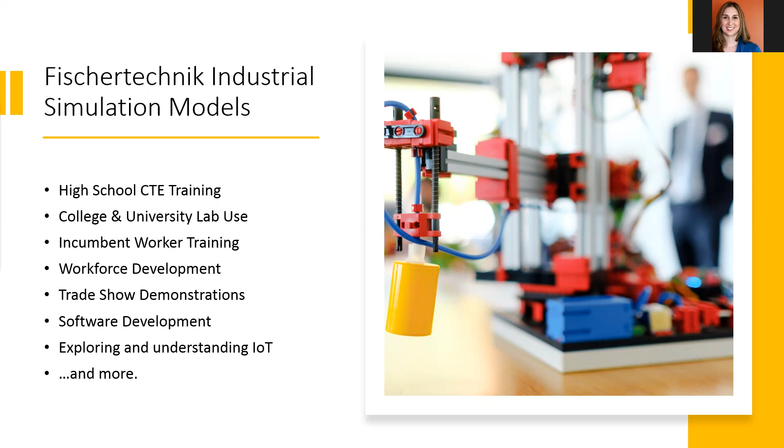Whether you're an educator at the high school level involved in CTE training, a college professor or industrial trainer teaching programming skills required in manufacturing, a company looking for ways to demonstrate their software-based solutions, or someone looking for ways to make IoT-related concepts easier to understand to employees or customers, I believe this presentation will offer some important options for you to consider.

Let's start off by considering the skills gap. If you've attended any of our other Fischertechnik education webinars, you've probably heard me discuss the importance of STEM education. STEM is the acronym for science, technology, engineering, and mathematics, and it should go without saying that STEM education has been perhaps the most discussed topic in education over the last decade.

As most of us are aware, the push for developing STEM skills in students is in large part to help best prepare them to take their place in the modern workforce.

Not so long ago when our parents or grandparents were entering the workforce, employers in areas such as manufacturing might have been satisfied with hiring workers who could demonstrate good motor skills and a solid work ethic. But as manufacturing becomes more and more dependent upon automated processes and robotic control, employers now desperately need individuals who have a background in areas such as mechatronics, industrial electricity, mechanical components, and programming PLCs.

As it ties in directly with the solutions we will be looking at in this presentation, let's consider that last skill area that I just touched upon, that of a PLC programmer.

First off, for anyone who may not be familiar, let me explain exactly what a PLC is. The term PLC is an acronym, the letters of which stand for Programmable Logic Controller. Essentially a programmable logic controller, or PLC, is a very specialized computer used to control the types of machines and automated processes typically found in an industrial setting, such as an automated manufacturing plant.

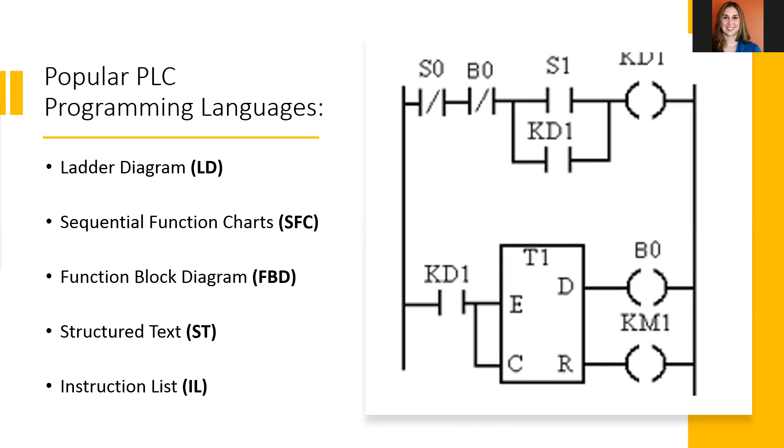Once again, while many students can learn PLC programming skills in a college lab setting, there are many other options available: high school CTE (career and technical education) programs, adult continuing education programs, vocational and technical training in trade schools, and employer-sponsored incumbent worker training programs.

That all being said, the question that still arises for the educator, whether in the university or vocational school setting, is how do you teach PLC programming in a way that makes it engaging and relevant to the student, whatever their background? How do you get away from the dryness of textbooks and video presentations and instead make it realistic and hands-on? But there are other areas of focus beyond programming that need solutions for demonstrating, exploring, and understanding different aspects of automation and control systems.

It could be a company involved in creating or marketing a new type of software-based solution, looking for ways to make more tangible processes which might otherwise be perceived as abstract, or to test it out in a more realistic fashion. Maybe it's a manufacturer looking for a way to better visualize the production process for workers or stakeholders as they prepare to build a new factory.

Or perhaps it's a company looking for an engaging way to demonstrate their services or solutions in a public setting, such as a trade show. In each of these cases and more, there is a need for finding a solution that is engaging and which can effectively mimic and simulate real-world automated systems.

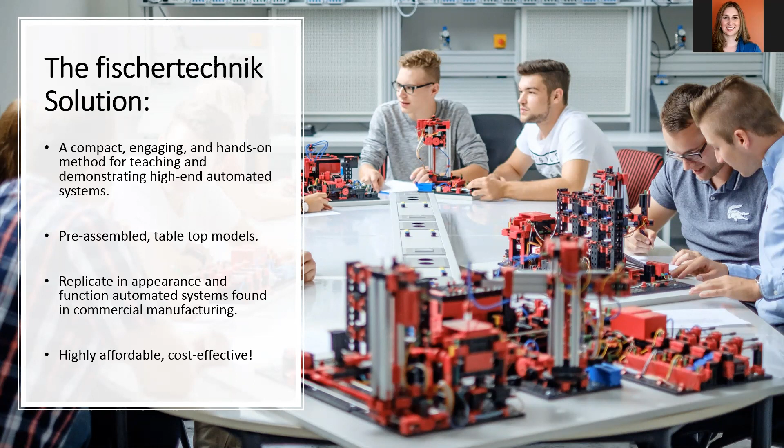And that brings us to the line of Fischertechnik industrial simulation and training models. These models have been designed with the intent of providing a compact, engaging, and hands-on method for teaching and demonstrating high-end automated systems. The line consists of a series of pre-assembled small-scale models which are designed to replicate, in both appearance and function, various automated robotic machines and systems commonly used in commercial manufacturing.

But before we look at each of these models, let me provide you with just a little bit of background. Fischertechnik has been creating tools for teaching students of all ages how technology works for over 50 years, based around their unique building system.

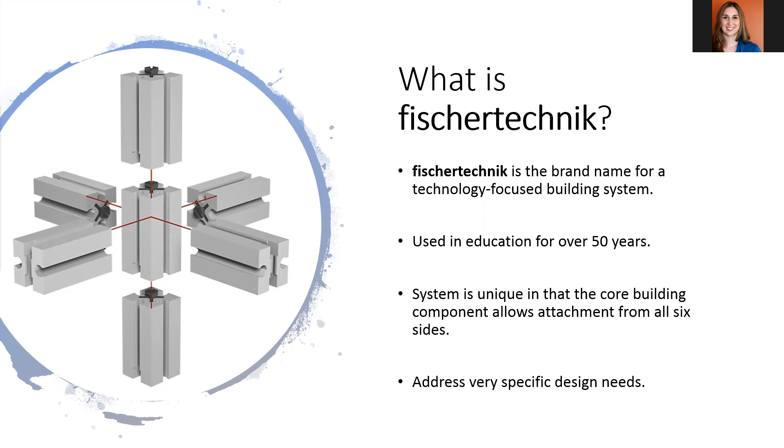What makes their building system so unique is that unlike other popular construction systems where the components are designed to simply stack, the Fischertechnik system was created with more of an engineering mindset. The core building block in their system is designed to enable attachment from all 6 sides, and because of this it allows for almost limitless design possibilities. Many of the parts are designed to slide together and lock in place using a tongue and groove assembly method, and the hundreds of different parts available also help to address very specific design needs.

The Fischertechnik system was created back in the 1960s by German inventor Artur Fischer, who's noted for countless innovations used in construction and the automotive industries. Mr. Fischer, at the time of his death in 2016, held more patents in his name than Thomas Alva Edison had amassed during his own lifetime.

Besides Fischertechnik, Mr. Fischer was the inventor of synchronized flash photography back in 1949, as well as the creator of the expanding nylon wall plug, which is used in conjunction with a screw or a bolt to help anchor heavy objects to walls. We've all used them, of course. His company, the Fischer Group, employs thousands of individuals worldwide, producing many variations of fastening devices used in building construction.

They also produce numerous components used in automobile assembly, as well as providing consulting services to companies who wish to employ state-of-the-art manufacturing processes. Once again, the focus of Fischertechnik sets, whether those intended for the retail market or for classroom use, has always been on helping to foster an understanding of technology and how things work.

Many of the products offered by Fischertechnik for the education sector are subject-specific sets, focusing on, for example, different STEM-related areas such as mechanics, pneumatics, robotics, or renewable energy. In many of these sets, students are asked to build a progression of models using the unique Fischertechnik system, and then perform various experiments which allow them to explore and understand aspects of that subject.

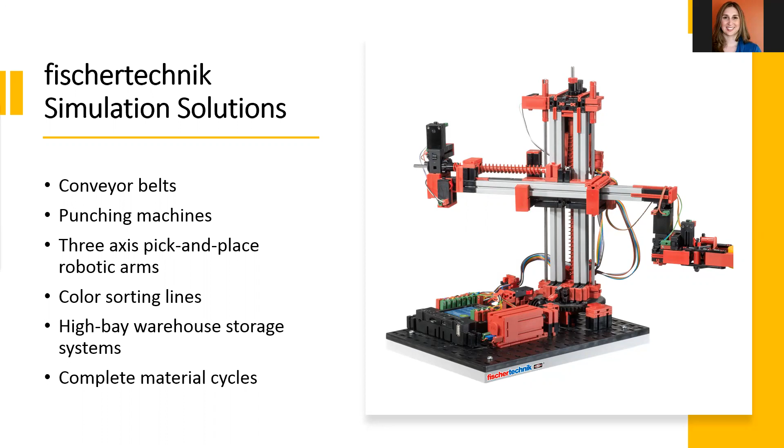Before we begin to look at the models in the simulation line in more detail, let me briefly outline some of the advantages of using Fischertechnik solutions. I do apologize in advance, as a few of the first points I'm going to touch on are things I mentioned before, but I think in each case it's worth repeating.

Fischertechnik simulation solutions allow educators to offer engaging, hands-on tools for teaching, exploring, and understanding various aspects of automation and programming. This can be for understanding how automated systems work, or for having a tangible physical system to observe and work with in a programming or PLC-focused learning environment.

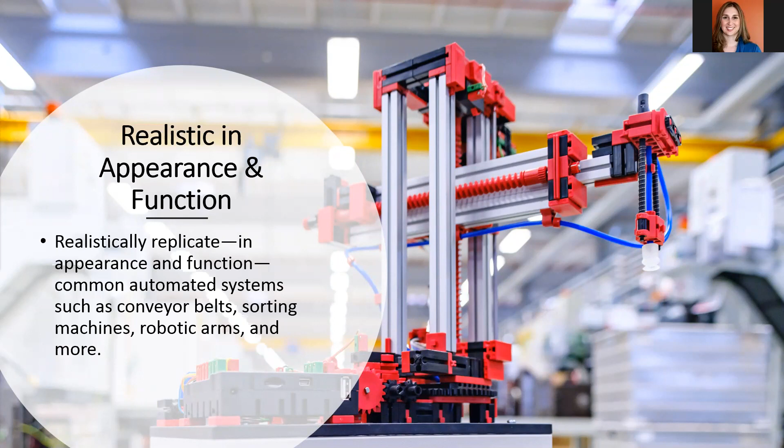The models, once again, are designed to realistically replicate, in both appearance and function, commonly automated systems such as conveyor belts, sorting machines, robotic arms, and much more.

Because the models are compact and in most cases tabletop sized, they are not only ideal for use in the classroom or in-office demonstrations, but also for demonstrating software or other technology-based offerings in a trade show environment.

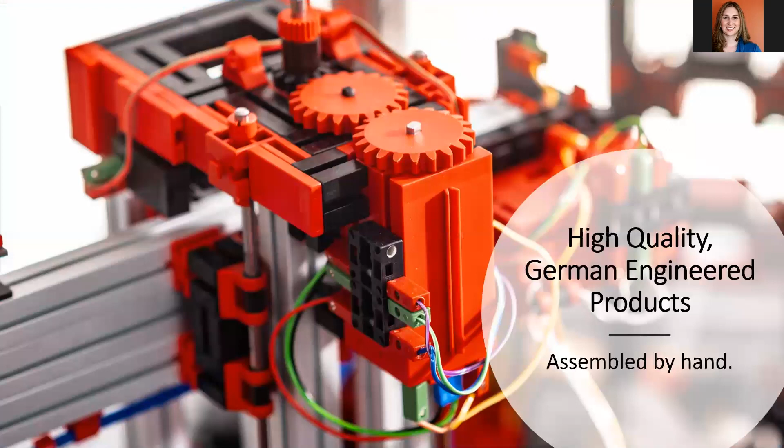Next, quality. Each fischertechnik simulation model is a hand-assembled, high-quality, German-made product.

Each of these models we'll look at today is available in a 24-volt version designed for use with industry-standard PLCs. Whether you use Allen Bradley controllers, Siemens controllers, or controllers from manufacturers such as Honeywell, Mitsubishi, General Electric, or of course many others, you can control these 24-volt versions with the PLC you prefer.

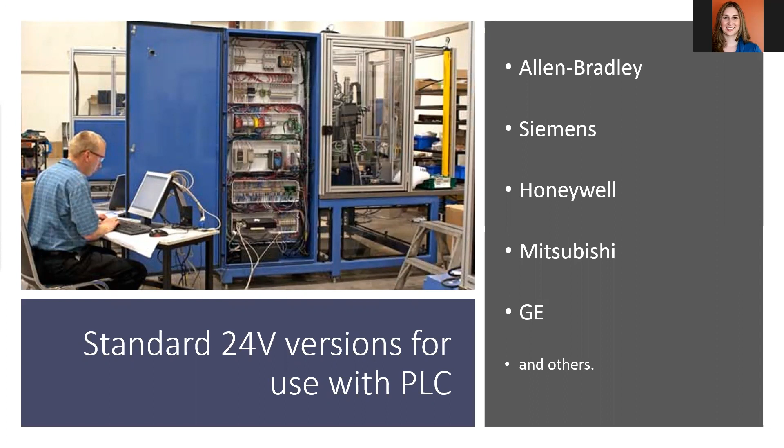Just as you can use your choice of controller, you can also use your preferred programming language. If you like ladder diagram or sequential function charts, you can use those. If you prefer function block, structured text, or instruction list, those are all available as well.

Please note that with these 24-volt versions, no PLC is included, and that all programming, with one exception I'll touch upon, along with any power sources or other hardware, are the responsibility of the end user. They are not included. This shouldn't be an issue, as these models are designed specifically for industrial users, or for those teaching or exploring industrial processes involving PLC programming.

In addition, for non-industrial users and educators not versed in or familiar with PLC programming, there are several models which are also available in 9-volt variations. These 9-volt versions ship pre-wired to fischertechnik's own proprietary robotic controllers, which are the fischertechnik Robotics TXT controllers.

Each of these controllers is pre-programmed using fischertechnik's own RoboPro graphic programming software. With these models, the only additional component required with the 9-volt versions will be the addition of one or more 120-volt power adapters, as I will specify with each model. Otherwise, in most cases, these models should be ready to use right out of the box.

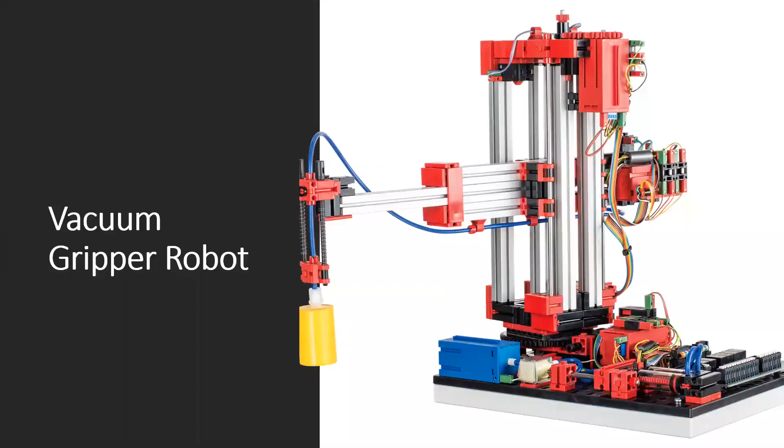And we'll have a video here. Okay, we'll see if it lags. We'll let this catch up a second before I start talking.

Yeah, it may catch up.

Now, as you'll see in this model, the vacuum gripper is a 3-axis robotic model with a vacuum gripping device. The model is designed to precisely pick up and position workpieces in 3-dimensional space. The model includes 3 encoder motors, 3 push-button limit switches, a vacuum suction device, a compressor, which is the blue brick component you'll see in the video, and a solenoid valve. The model's dimensions are approximately 9 by 19 by 15 inches, and it has a weight of about 7 pounds.

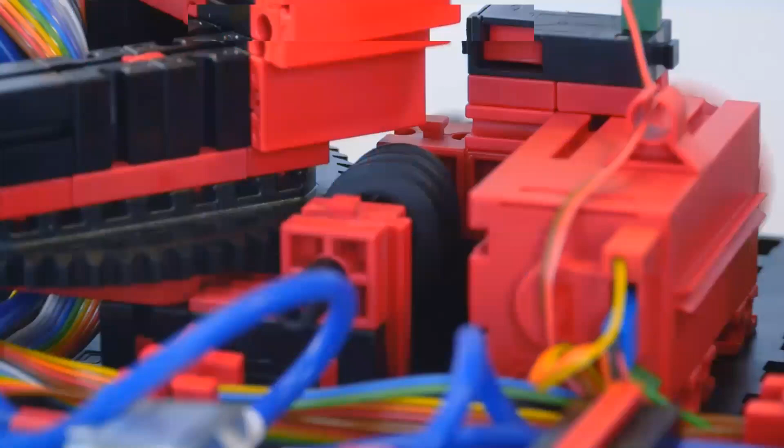The 24-volt version of this model, as well as the first 5 24-volt models we're going to look at today, each have a relay board for motor polarity reversal and both a multi-pin connector with 34 pins and a grid of 2.54 millimeters, as well as additional PCB terminals with push-in connections for all inputs and outputs. Again, the 24-volt version of this model, as well as all 24-volt versions we'll look at, will require you to provide the PLC and the programming.

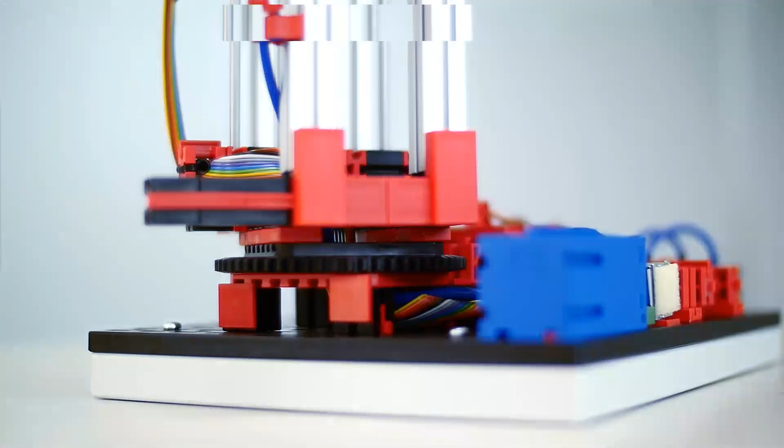Now, for a limited time, there is a 9-volt version available, which is the version you see in this video, which will once again come wired to the fischertechnik Robotics TXT controller and will ship fully programmed using RoboPro graphic programming software. If you did wish to create your own programming, individual licenses of RoboPro are available on our website. Otherwise, for this 9-volt version, only the addition of a single 120-volt power adapter will be required.

I will mention that for this and all the other models we're going to look at today, the specs are also detailed in the product listings found on the Studica website, as well as in our product brochure, which I will provide information on obtaining at the end of this presentation.

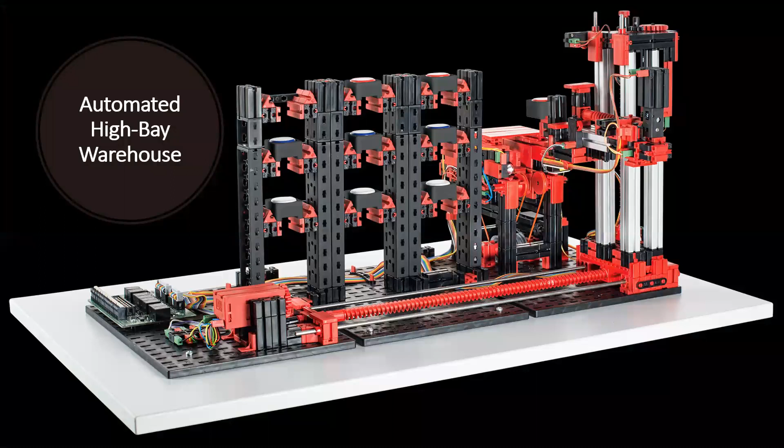Next, we're going to look at the automated high bay warehouse. And again, I thank you for bearing with me for any video lags.

This model features a transfer station with a conveyor belt, along with a shelf stacking mechanism for storing and retrieving workpiece carrier trays, and 9 individual storage spots. Components of this model include 2 encoder motors, 2 mini motors, 4 push-button limit switches, 2 photo transistors, 2 LED light barriers, and a selection of different colored workpieces, along with carrier trays for each.

I will mention that this particular model is a favorite among educators I've spoken with who teach programming because it gives you a lot to work with in regards to the movements of the picker mechanism, as well as the precision required to properly store and retrieve each piece, each step of which will of course require its own very specific coding. The dimensions for this model are approximately 19 by 28.5 by 15 inches, and it has a weight of approximately 18 pounds.

Once again, the 24-volt version has a relay board for motor polarity reversal and both a multi-pin connector, again 34 pins with a grid of 2.54 millimeters, as well as additional PCB terminals with push-in connections for all inputs and outputs. Again, you will need to provide your own PLC and programming.

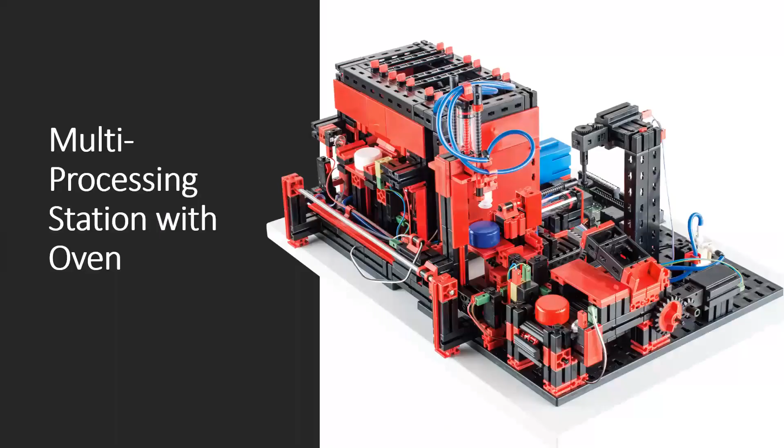I will mention that a limited edition 9-volt version is available at this time, which again is pre-wired to a pre-programmed robotics TXT controller. And in this case, one 120-volt power adapter will be required. Next up in our line is the multi-processing station with oven simulation.

This model features a furnace simulation, which you will see in just a second, with a pneumatic sliding door. There is a downstream processing station with a pneumatic transfer unit that includes a vacuum gripper, a cutter with a rotary table, and a conveyor belt.

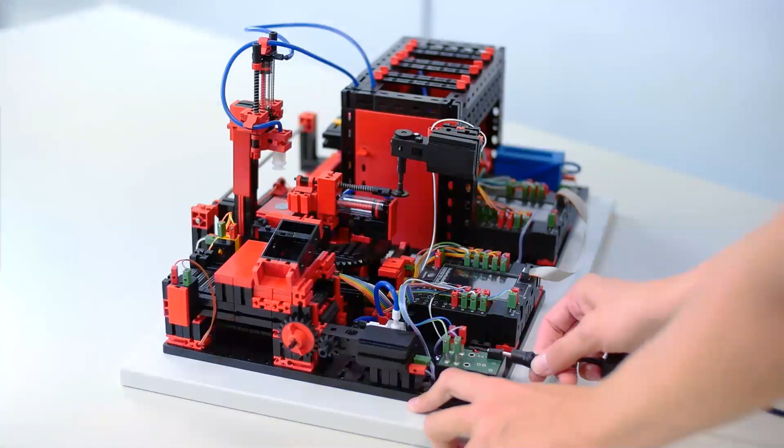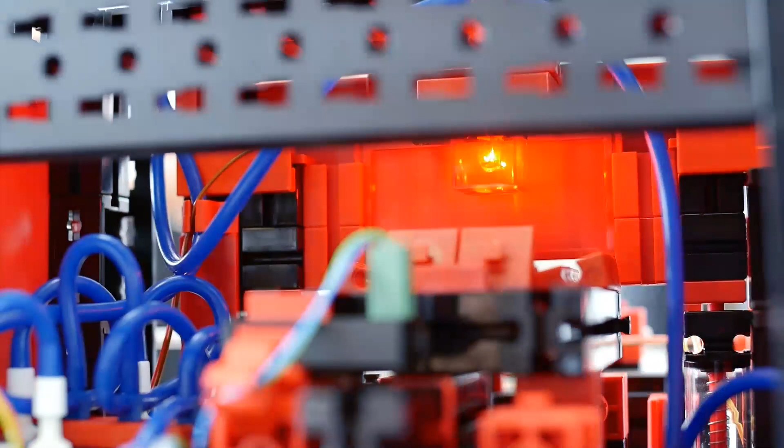Components used on this model include 4 mini motors, 6 push button limit switches, 2 photo transistors, 2 LED light barriers, 4 solenoid valves, and a compressor. The dimensions for this model are approximately 20 by 14 by 12 inches, and it has a weight of about 11 pounds.

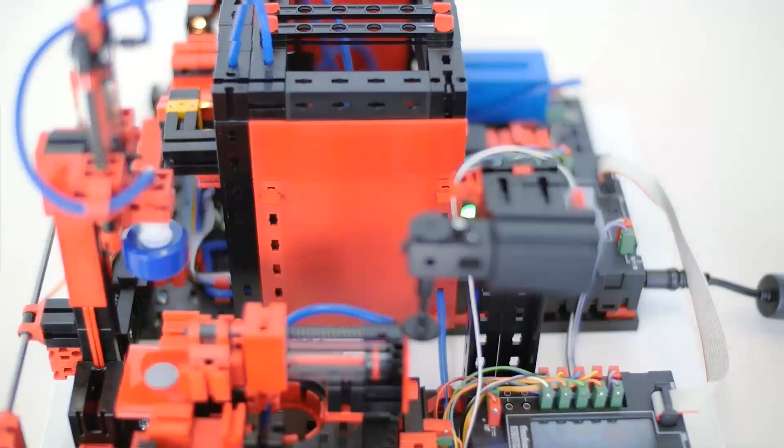Again, the standard version of this model is a 24-volt version for use with the PLC of your choice, with, once again, a relay board for motor polarity reversal, and both a multi-pin connector, again 34 pins with a grid of 2.54 millimeters, as well as additional PCB terminals with push-in connections for all inputs and outputs.

The limited edition 9-volt version in this case is connected to 2 robotics TXT controllers, so 2 120-volt power adapters in this case will be required for all operations.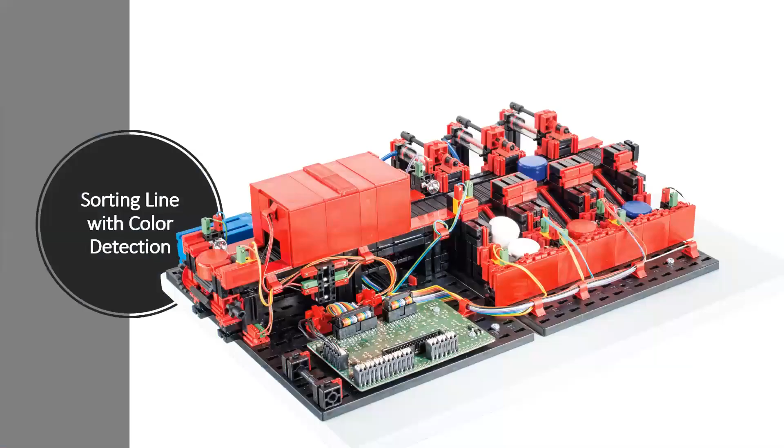Next up is the sorting line with color detection. This simulation features a system for detecting workpieces of different colors and sorts them via a conveyor belt into 3 different storage bins. Components on this model include 2 mini motors, 5 photo transistors, 5 LED light barriers, 3 solenoid valves, a compressor, and an optical color sensor.

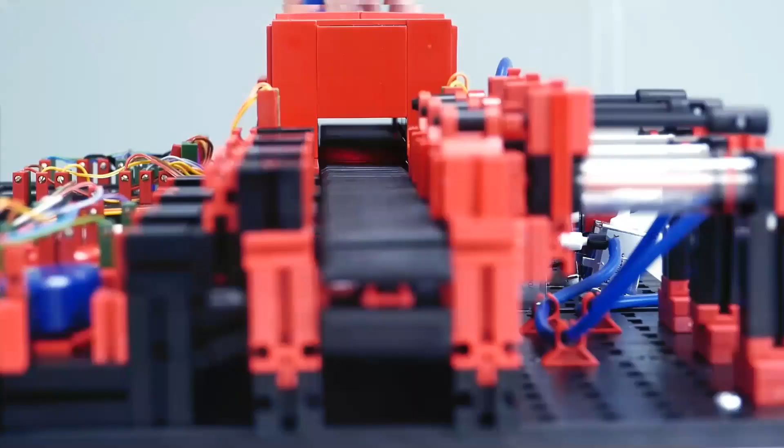The dimensions for this model are approximately 20 by 14 by 12 inches, and it has a weight of about 10 pounds. Now, as with the models we've looked at before, the standard 24-volt version has a relay board for motor polarity reversal and both a multi-pin connector, again 34 pins with a grid of 2.54 millimeters, as well as additional PCB terminals with push-in connections for all inputs and outputs.

Now, again, you will need to provide the PLC and the programming. And there is a limited edition 9-volt version, very limited right now, which comes again pre-wired to a pre-programmed TXT controller. And in this case, one 120-volt power adapter is required.

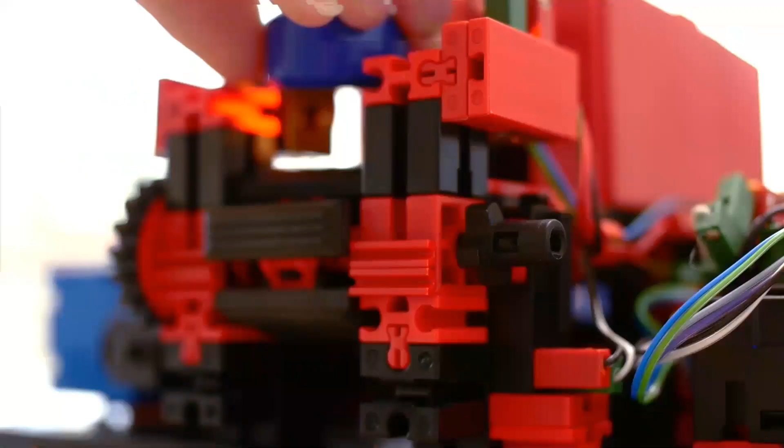And that's all of those.

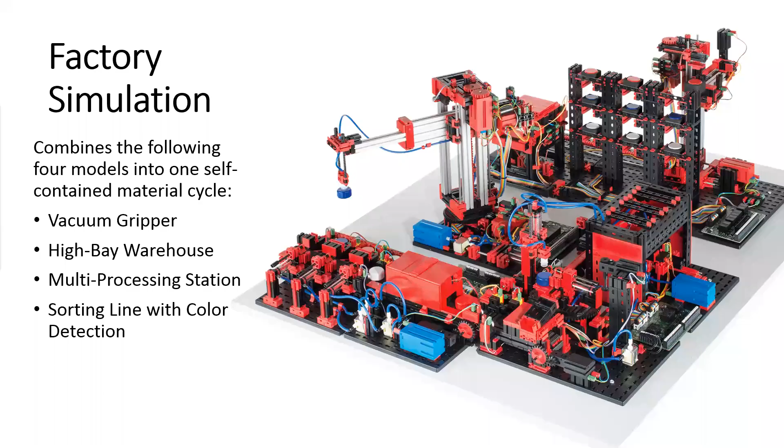The next model is the factory simulation, which combines the 4 models that we've just reviewed. Again, the vacuum gripper robot, the automated high bay warehouse, the multi-processing station with oven, and the sorting line with color detection into one self-contained material cycle.

The cycle we're going to see works like this. Work pieces are retrieved from the automated high bay warehouse using the vacuum gripper robot, and then moved to the multi-processing station with the oven. After the workpiece has been processed by this machine, it is then sorted by color in the sorting line with color detection, before again being moved by the vacuum gripper robot to the automated high bay warehouse for storage.

Now, as we've already discussed the components of each model previously, I won't belabor it by restating them here, but what I do want to discuss are the dimensions of this model as a whole. As it again combines 4 individual models into one work cycle, it has a much larger footprint of approximately 39 by 31 by 16 inches, and it has a weight of between 43 and 46 pounds, depending on whether we are talking about the 24-volt version or the limited edition 9-volt version pre-wired to the TXT controllers.

Now, due to these dimensions, please note that this model will only be shipped flat as freight on a pallet. And I also want to point out that as the factory simulation models tend to be in high demand, we would ask that you please anticipate a possible turnaround time of up to 3 weeks prior to any orders for this model leaving our warehouse.

Now, a few other things to note. First, this is currently available in the standard 24-volt version and in very limited quantities in a 9-volt version. Now, in this instance, the 9-volt version is wired to 5 robotics TXT controllers. As such, it will require 3 120-volt power adapters.

Now, as always, the 24-volt version will require the end user to provide any PLCs, all programming, and any other hardware required. Again, each station on the 24-volt version has a relay board for motor polarity reversal, and both the multi-pin connectors, again 34 pins with a grid of 2.54 millimeters, as well as additional PCB terminals with push-in connections for all inputs and outputs.

Now, before we move on to the next group of models, I do want to mention that there is a storage option available for those users of either of the two factory simulations we've just discussed, who might want to transport the model, or if you just want to protect it when you're not using it.

Now, this travel case consists of an aluminum case maker profile with plastic plates, and steel ball corners, as well as 4 steel tilt handles and angle protection corners. The upper section of the case is partially lined with soft foam blocks in different heights to help cushion the model, and it also has 3 internal zipper pockets for storing cables and other accessories.

The lower portion is lined with hard foam. It's designed so that once the top of the travel case is removed, the model can remain in the bottom section of the case and still remain fully functional. The case itself has exterior dimensions of approximately 41 by 33 by 17 inches, and it has a weight of about 53 pounds. Now, please note that even when using the travel case, these models will still need to be shipped flat.

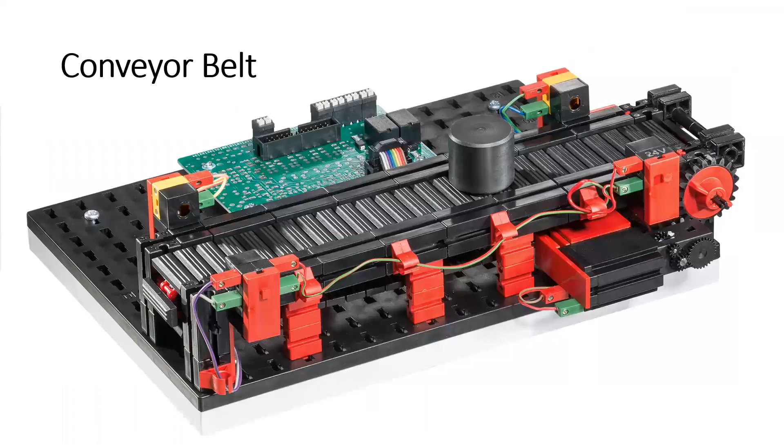The next model is a basic conveyor belt. This is a transport belt with a length of 275 millimeters that is used to transport workpieces with a diameter of up to 29 millimeters. Multiple conveyors can easily be connected to increase the length of transport as desired.

Components on this model include an XS motor, a push-button limit switch, 2 phototransistors, and 2 LED light barriers. Dimensions of this model are approximately 14 by 10 by 4 inches, with a weight of under 2 pounds. As before, the standard 24-volt variation includes a multi-pin connector, in this case 26 pins with a 2.54 millimeter grid, as seen here. For a limited time, we also offer 9-volt versions pre-wired to the robotics TXT controller, as shown here. One 120-volt power adapter is required for operation.

The next model is a variation on the conveyor belt, but which includes a punching machine. This is essentially the same conveyor as we just looked at, except that this time it has a machining station attached to it. Components on this model include 2 XS motors, 2 push-button limit switches, 2 phototransistors, and 2 LED light barriers. Dimensions of the model are approximately 15 by 12 by 7.5 inches, with a weight of about 3.5 pounds.

Again, this is available in the standard 24-volt variation with a 26-pin connector and a 2.54 grid, as shown here. For a limited time, we will also be offering a 9-volt version wired to the robotics TXT controller, which requires one 120-volt power adapter for use.

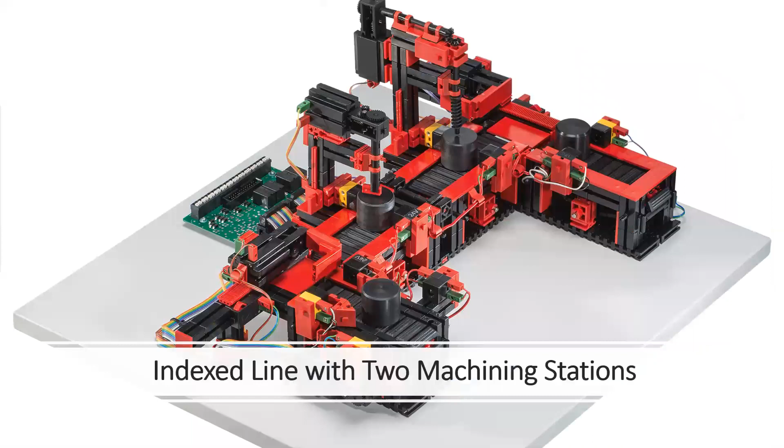The next model is the indexed line with 2 machining stations. This model features a U-shaped conveyor line consisting of a milling and a drilling station and 4 conveyor belt sections. Components on this model include the 4 conveyor belts, 8 XS motors, 4 push-button limit switches, 5 phototransistors, and 5 LED light barriers.

The dimensions for this model are approximately 19 by 18 by 11 inches, with a weight of about 8 pounds. Again, it's available in both the standard 24-volt version with a 26-pin connector and a 2.54 millimeter grid for use with PLC, and also in a limited release 9-volt version wired to the pre-programmed robotics TXT controllers, requiring one 120-volt power adapter.

Next is a variation on the idea of a pick-and-place robot, which is the 3D or 3-axis robot. The 3-axis robot has gripping forceps, which it uses to help it quickly and precisely position the workpiece as it picks it up in 3-dimensional space.

The degrees of freedom for the robot are as follows. Axis 1 turns 180 degrees. Axis 2 can move forward or backward 90 millimeters, and axis 3 can raise or lower 150 millimeters.

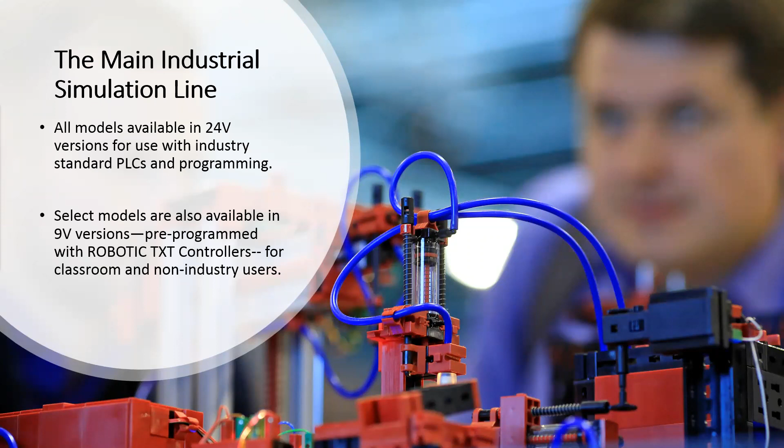That concludes our look at the first 9 variations of simulation models. The next pair of simulation models focuses specifically on the area of IoT and is designed for demonstrating and teaching about cloud-based monitoring and control.

These models go by the name of Training Factory Industry 4.0, and are available in both 24-volt versions for use with PLC, and also in a 9-volt variation for classroom and demonstration purposes. They've been designed to help address how the recent changes in industrial production, driven by digitization, have created a need for stronger networking and more relevant information on all production levels.

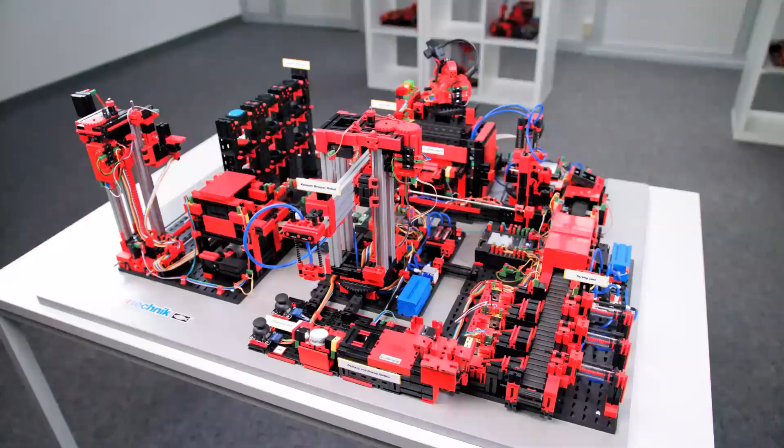With this Industry 4.0 update of the existing factory simulation model, such digitization activities can be simulated, learned, and applied on a small scale before they are implemented on a larger scale. As the following video showcasing the 24-volt version provides a nicely narrated overview of how the factory works, I'm going to step back for a moment and allow you to watch and listen to the narrator.

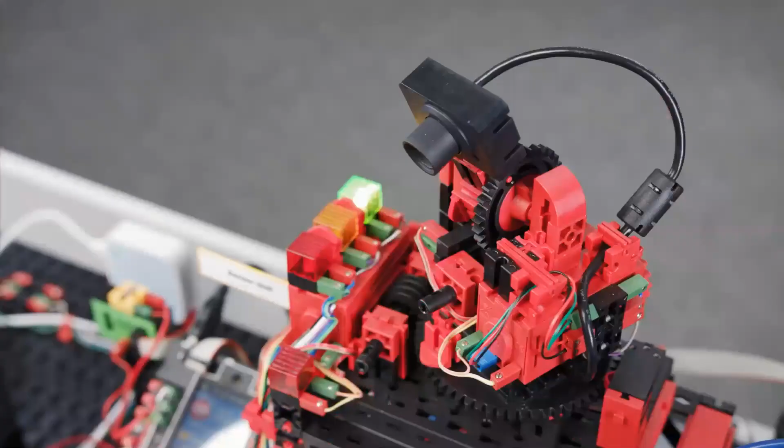Fischertechnik Learning Factory 4.0 illustrates processes for a digitized smart factory, from delivering raw material to the finished product. Industry 4.0 applications can be tested and demonstrated using the simulation model. Digitization activities are simulated on a small scale and learned before they are used on a large scale.

The training and simulation model demonstrates the process from the delivery, collection, and storing of the materials through the ordering and manufacturing processes to delivering the finished product.

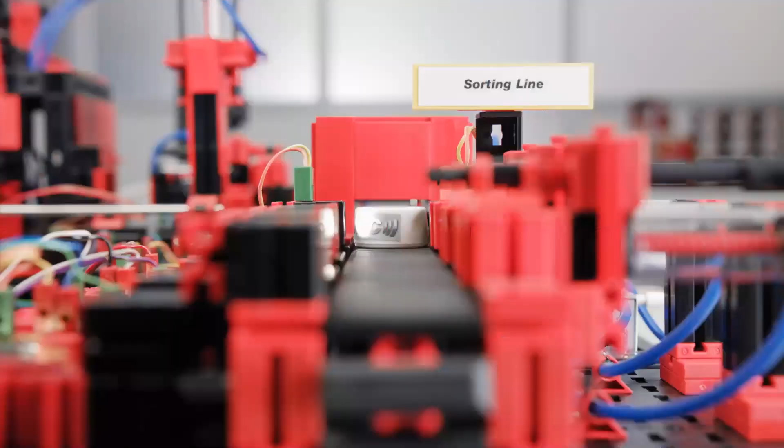The training factory industry is controlled by a PLC controller, a Raspberry Pi as IoT gateway, and a TXT controller. The PLC program controls the individual modules of the factory. The program is written in structured text.

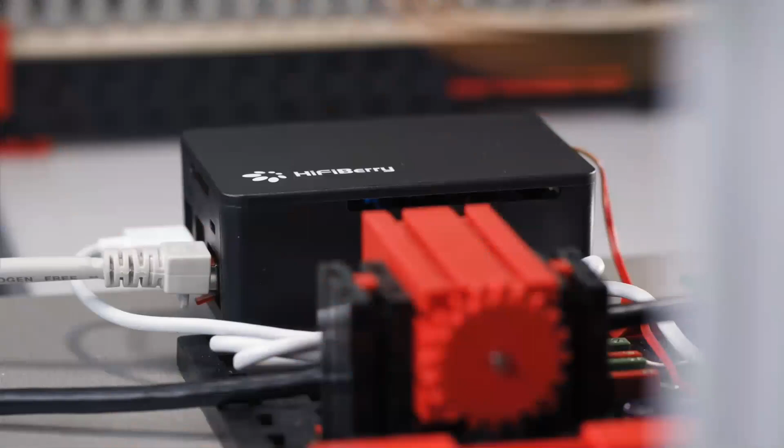The PLC communicates via the standard OPC UA protocol with the Raspberry Pi, which acts as an IoT gateway to connect the factory to any cloud. The program on the Raspberry Pi is implemented in Node-RED. In Node-RED, there is an additional local dashboard available, which can be adapted to your own needs.

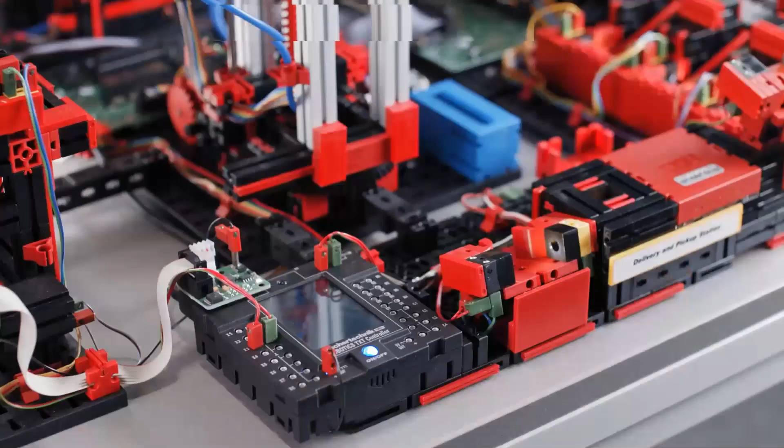The Raspberry Pi also communicates with the TXT controller via the standard MQTT protocol, which in turn enables access to the fischertechnik cloud. The program on the TXT controller is executed in C/C++.

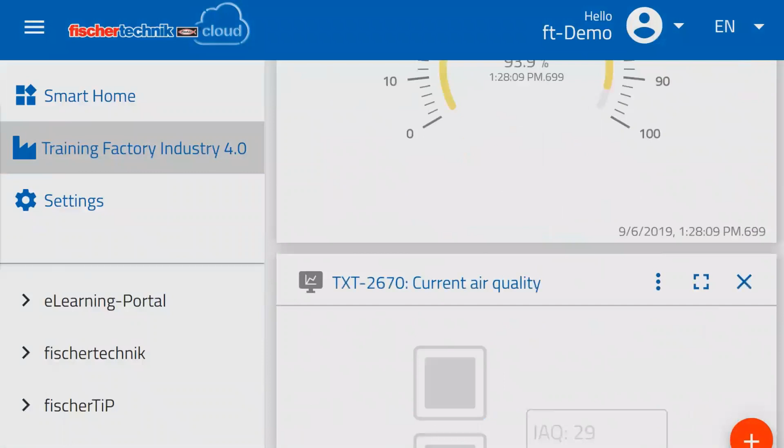The sensor image data are used and monitored in the fischertechnik cloud. The integrated WLAN router transmits factory process data to the cloud in real time. The data is presented on a web-based dashboard.

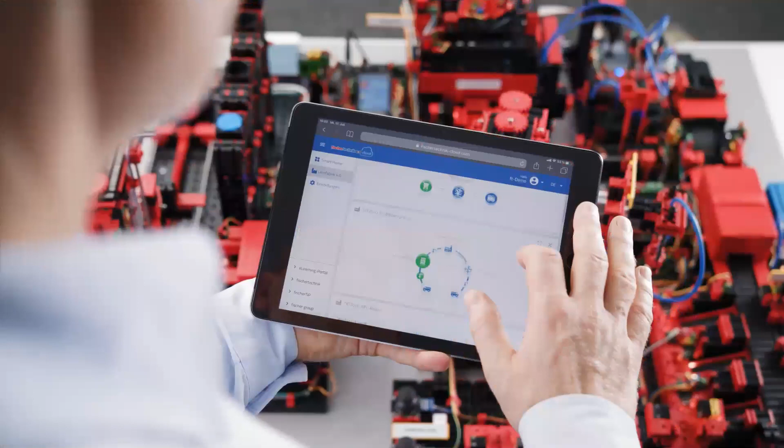Three views are available: the customer view, supplier view, and production view. The views and data can be accessed using internet-enabled devices and can also be used remotely.

The USB camera is controlled from the cloud and can view the entire factory. A sensor station measures air pressure, air quality, temperature, humidity, and brightness.

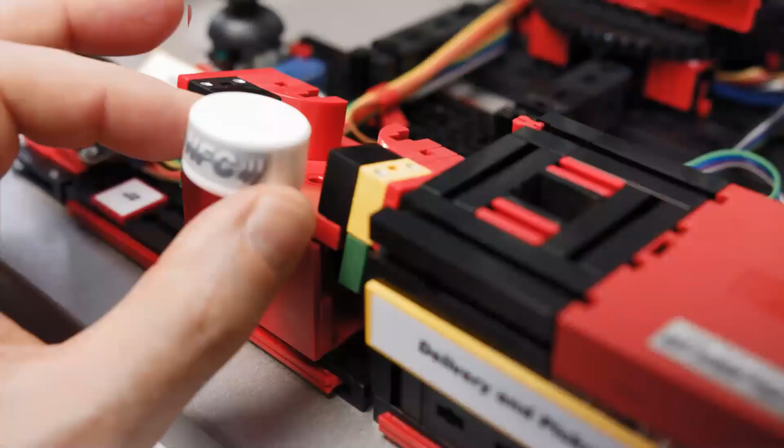The default process cycle begins with storing and identifying the material. Using RFID/NFC technology ensures that the material can be digitally traced. The integrated NFC tag stores production data that can be read out via the RFID/NFC module.

The cloud displays the part's color and ID number. The vacuum gripper places suction on the material and transports it safely to the high bay warehouse. The production view on the dashboard shows where the product is in the manufacturing process.

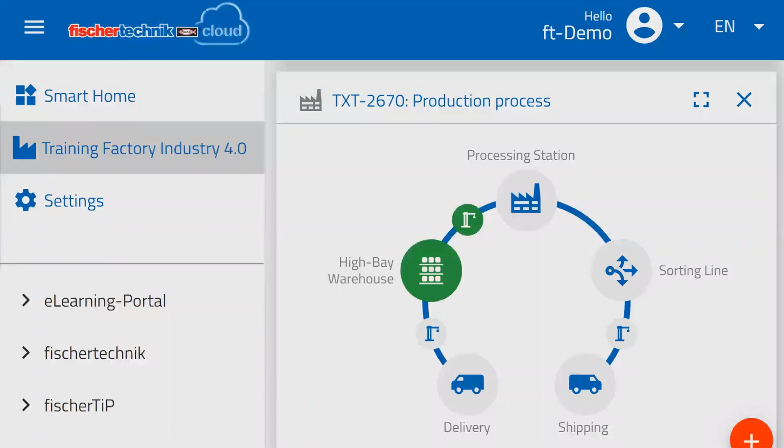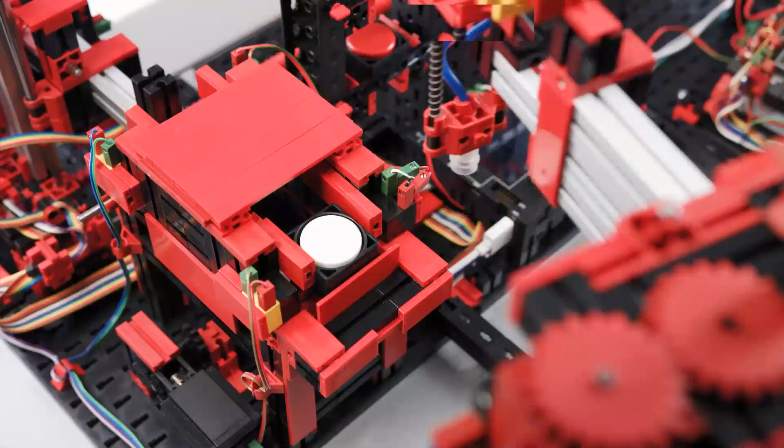The first in, first out principle applies to outsourcing. The goods that were stored first are also the first to be removed.

Ordering material is triggered online on the dashboard. The desired product and corresponding color are selected in the customer view and then placed in the shopping cart. Customer-specific production takes place in lot size 1.

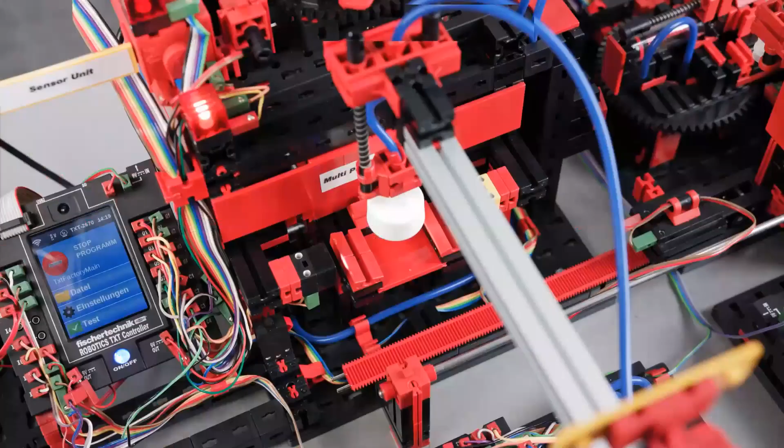The production process is simulated in 2 steps. The suction gripper passes the material on from one step to the next.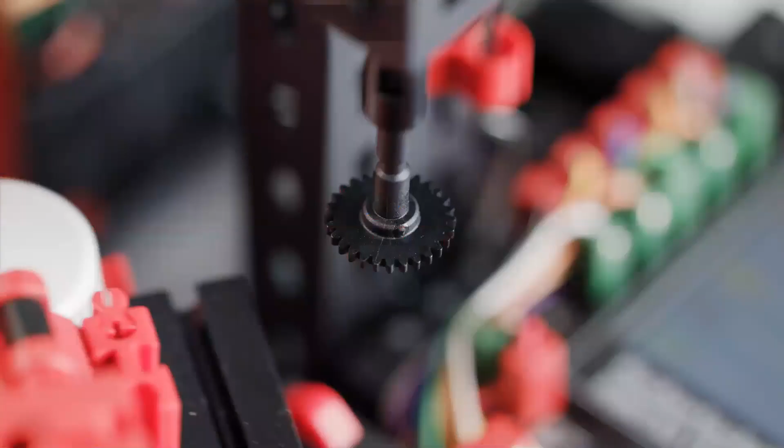The material is transferred to the sorting system once production is complete. The sorting system receives the allocation command as soon as the color sorter detects the proper color. The material is sorted using pneumatic cylinders.

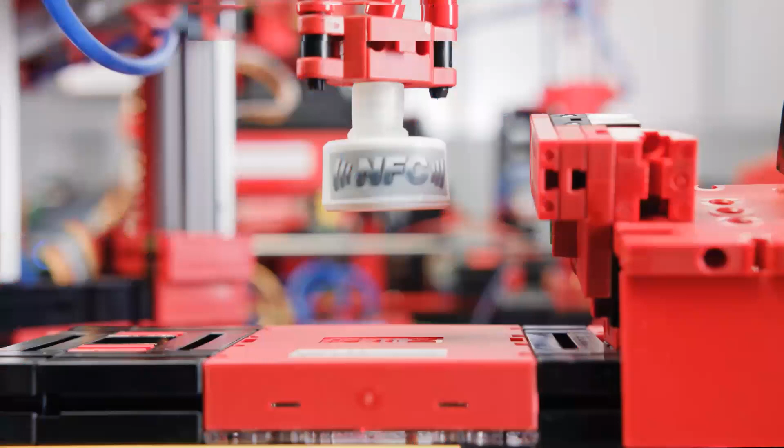Production data is written on the material at the end of the production process. The finished product will be provided for collection.

Instructional material and the source code for the stored programs are available online.

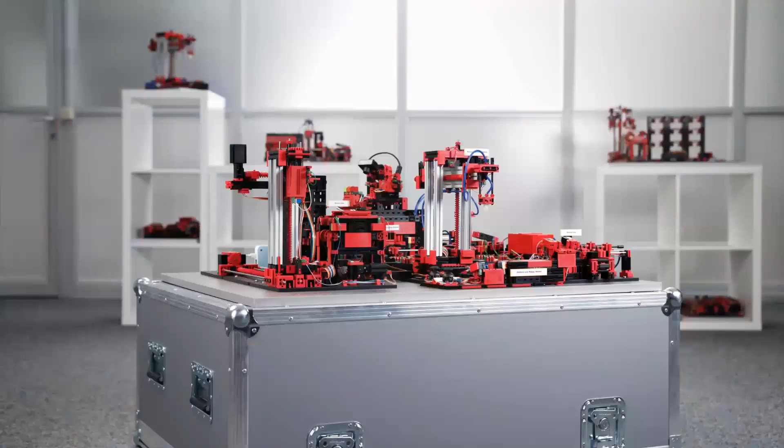The fischertechnik Learning Factory 4.0 is ideally suited for education and training in vocational schools and companies, for research and teaching in colleges and universities, for development projects in IT departments, for production planners, and for demonstrating in-house software solutions at trade shows and other corporate events. The customized storage and transport case is a worthwhile add-on.

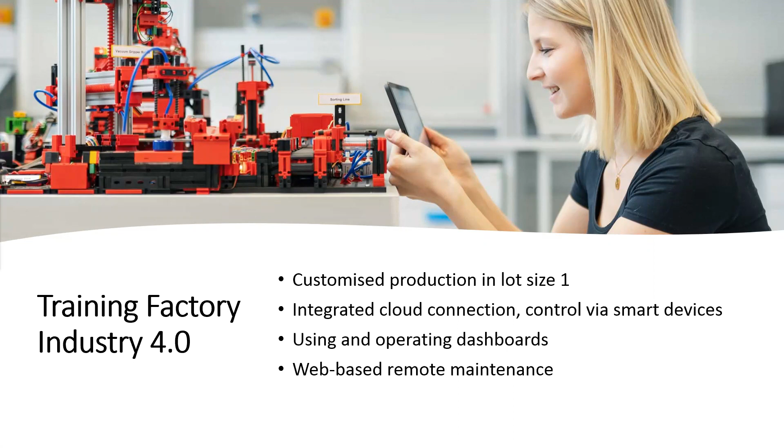The following topics can be addressed with the fischertechnik Training Factory Industry 4.0: training and simulation on a realistic production model, in-depth learning through haptic comprehension, optical and sensory applications, digital traceability with NFC/RFID technology, customized production in lot size 1, integrated cloud connection and control via smart devices, using and operating dashboards, web-based remote maintenance, the linking of production and materials planning data, and the connection of upstream and downstream logistics processes.

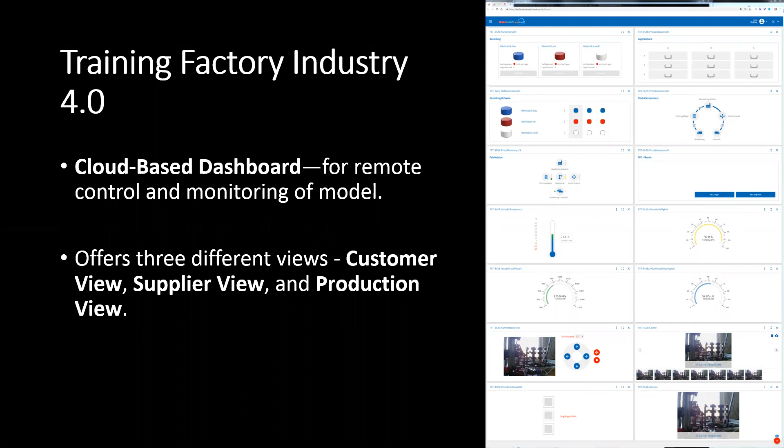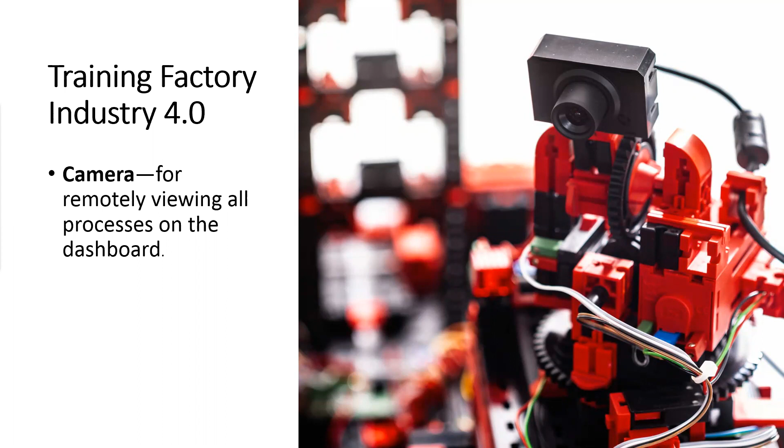As you just saw, the model incorporates many features not found in the models we previously discussed, most notably the use of the cloud-based dashboard for monitoring and controlling the model. Some other examples would be the camera used for visually monitoring the factory functions from the cloud-based dashboard, as well as the environmental sensor, which collects data on variables such as temperature, air quality, humidity, and air pressure.

The use of NFC chips in each individual workpiece, each with a unique identification number, enables the position of each piece in the work cycle to be mapped, and the use of MQTT, message queuing telemetry transport, allows the networked TXT controllers to communicate with one another.

As there are 2 variations of this model, let's briefly go over what makes them different, aside from the voltage requirements. We'll begin by focusing on the 24-volt version and what makes it unique.

First, it is a bit of a hybrid in that while it requires a PLC for operation and control, it does also incorporate one fischertechnik Robotics TXT controller. The TXT controller in this case serves as the MQTT broker and interface to the fischertechnik cloud.

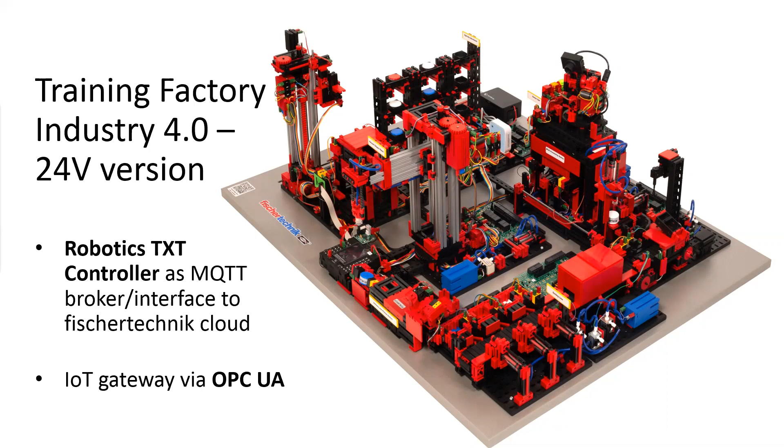Communication between the PLC and TXT controller is carried out using an IoT gateway via OPC UA, which is also known as OPC Unified Architecture, a standard for exchanging data across different platforms.

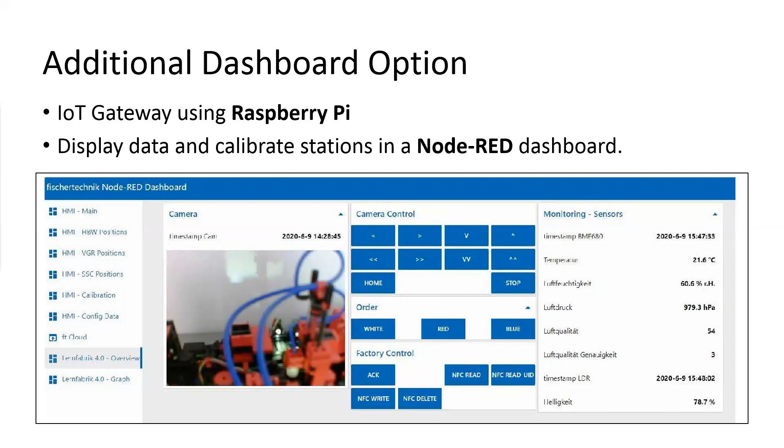In addition to the TXT controller used here, there is also an IoT gateway using Raspberry Pi with Node-RED. This allows the option for not only presenting and using data on a dashboard in the fischertechnik cloud, as we just saw with the 9-volt version, but also to display data and calibrate the stations of the factory in a Node-RED dashboard.

The model also incorporates newly developed 24-volt adapter boards to interface to the PLC. These ship as part of the assembled training factory and are connected to the PLC via terminals. Among other things, the latest generation of adapter boards allows the speed of the encoder motors to be controlled via PWM, also known as pulse width modulation, and they also have push-pull output stages for phototransistors and for buttons.

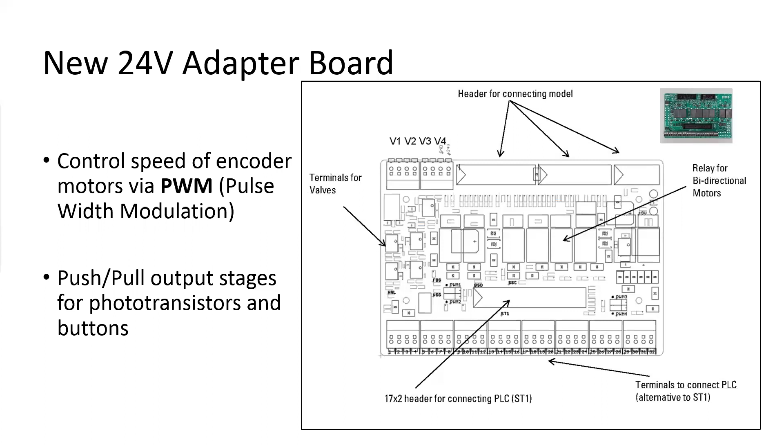Finally, one of the most important new features, unlike any of the previous 24-volt models we've discussed today, the new 24-volt Training Factory Industry 4.0 also includes access to a sample program. The program in this case is in structured text format, and it was created based upon a Siemens S7 1500 PLC, and this is available for download on GitHub.

Of course, the new Training Factory can also be controlled with other PLC models and brands once the end user makes some small adjustments to the sample program. The source codes needed to do so are available for download from GitHub as well. So you'll have access to all this when you purchase the model.

Now, as with the first of the 24-volt models we looked at today, each of the workstations of the 24-volt variation of the Training Factory Industry 4.0 model have a relay board for motor polarity reversal and both a multi-pin connector, again 34 pins, with a grid of 2.54 millimeters, along with PCB terminals with push-in connections for all inputs and outputs.

All of this information and much more is included in the 152-page PDF manual, which would accompany this model. They can also be downloaded directly from the fischertechnik website or from the Studica website. So if you go to the Studica website, under the product specs for this model, you will find a link to download this, and you're welcome to review any of the material.

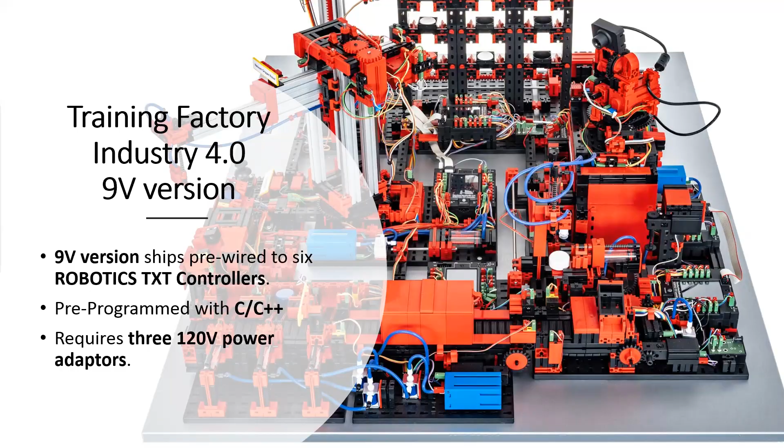Now, as with the 2 factory simulation models which we discussed previously, we do recommend the optional travel storage case to help protect your model during transport or storage. And that's the Training Factory Industry 4.0 model, again available in both 24-volt and 9-volt variations.

Of course, you might well be wondering how much these models cost. So with that in mind, let's take a quick review of each option I've discussed, along with the pricing for each.

First off, we have the vacuum gripper robot, the 24-volt version, again requiring PLC, $899 each. The limited edition 9-volt version, pre-wired to the pre-programmed robotics TXT controller, is $1,199 each. The automated high bay warehouse in the 24-volt version is $1,035. It again requires a PLC. The 9-volt version, pre-wired to the TXT controller,

$1,319. The multi-processing station with oven in the 24-volt version requiring PLC, $989 each. The 9-volt version pre-wired to the TXT controller is $1,479 each. Actually, I believe that one has two. Sorting line with color detection, the 24-volt version, $819. The 9-volt version with the TXT controller is $1,129.

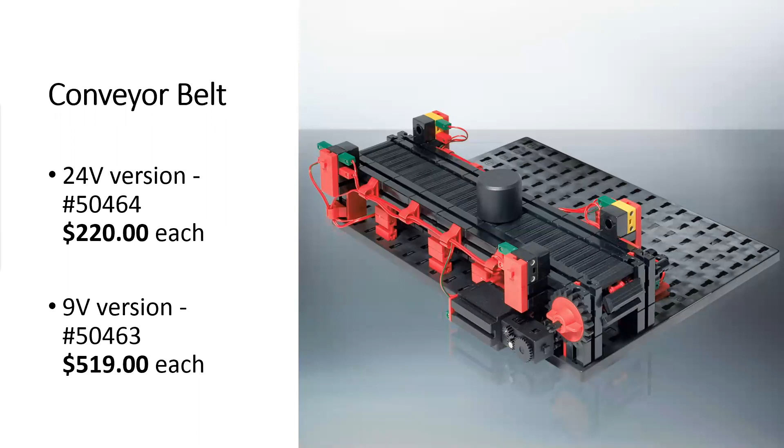The full factory simulation in the 24-volt version, $3,729 each. And in the 9-volt version, $5,239 each. I will reference as well that a couple of these prices I know will be going up in the coming months, so I would ask that you contact us probably for a quote soon so you can get these prices grandfathered in. When we get to the conveyor belt, the 24-volt version is $220 each, again requires PLC.

The 9-volt version is $519 each. That's already, of course, wired to the TXT controller. The punching machine with conveyor belt in the 24-volt version, $289 each. The 9-volt version is $599 each. The 3D robot, again, this is one that's going to be available in the 24-volt and 9-volt versions moving forward.

The 24-volt version is $829. The 9-volt version is $1,099. The indexed line with two machining stations, 24-volt version is $879. The 9-volt version is $1,399.

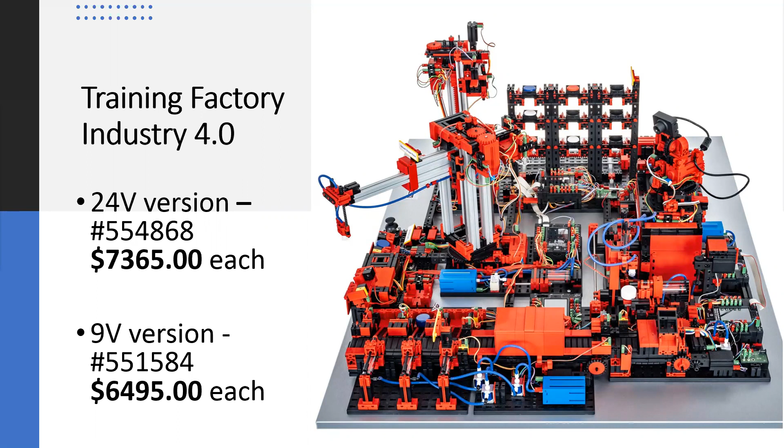And finally, the Training Factory Industry 4.0 for demonstrating and exploring IoT. The 24-volt version with the sample program, $7,365 each. The 9-volt version pre-programmed in C, C++, pre-wired to the TXT controllers, $6,495 each. And other items that I've touched on throughout the presentation, the 120-volt power adapters, which are required for

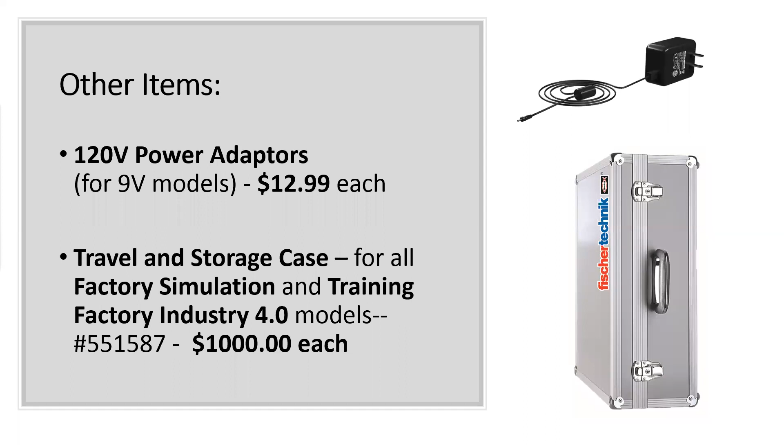Powering the 9-volt models, are $12.99 each, very reasonable. The travel and storage case, which can be used for any of the factory simulation models or the Training Factory Industry 4.0 models. These are $1,000 each.